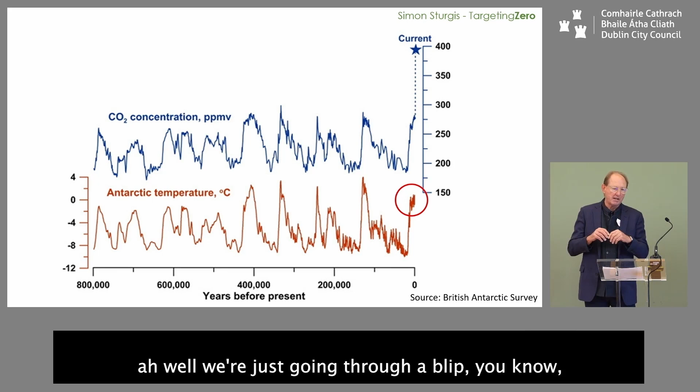The reason for this is because a lot of people say, well, we're just going through a blip, this is normal, it goes up and down, and we'll be back to normal in a couple of decades. What this is showing, if you look at the top line, which is carbon dioxide concentration in the atmosphere, and the red line below is Antarctic temperature—this was from data sourced by the British Antarctic Survey. Both of these graphs cover the last 800,000 years, so that's a pretty significant period of time. You'll notice two things: one, temperature and carbon follow each other around, and secondly, they go up and down roughly every 100,000 years.

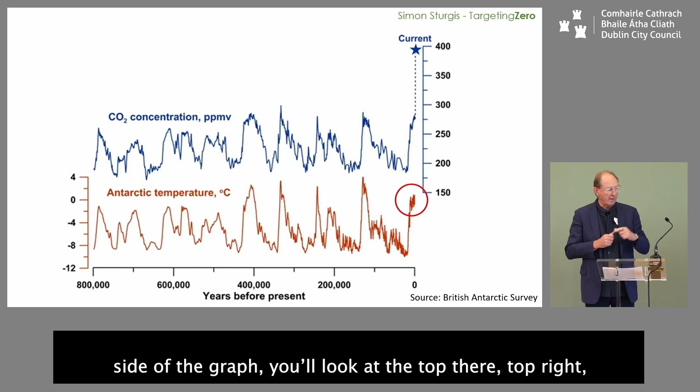If you move over to the right-hand side of the graph, at the top right, there's a little blue star showing what it says is current. In fact, that's a bit out of date—it's now about 425 parts per million. It's gone up since this graph was done in about 2016. You'll see, obviously, that has jumped right out of the normal rhythm.

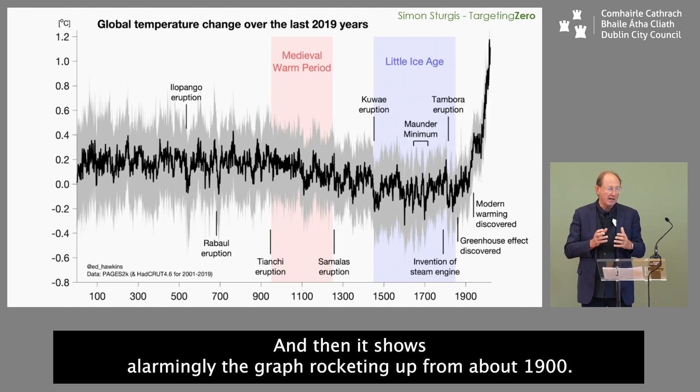Below that, I've put a red circle around the top bit, which represents the last 2,000 years. If I zoom in on that, this is what the last 2,000 years looks like. You'll see that there is variation year on year and decade on decade. It highlights things like the medieval warm period, the little ice age over the 1500s, 1600s, 1700s, 1800s, and then it shows, alarmingly, the graph rocketing up from about 1900. That's happening in parallel with that carbon dioxide rise and the little blue star.

So this is significant and real. It is jumping out of the regular rhythm of things. And anybody who says, well, it's just temporary—I'm not a climate expert by any means, but I think this is pretty convincing.

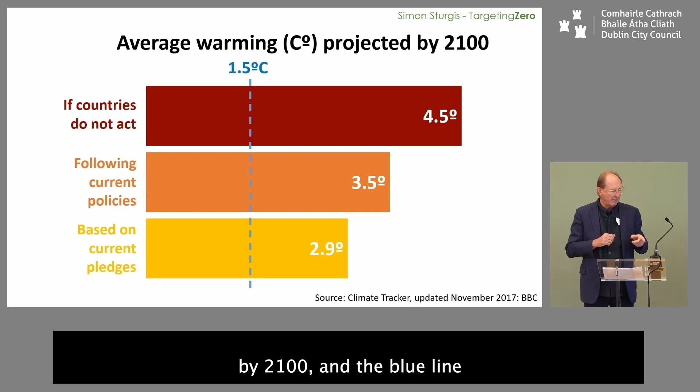So if we look at what it is we're supposed to be doing, certainly with the COP, the international agreements, the idea is to limit the temperature increase to 1.5, maybe 2 degrees at the outside. This is showing what things might look like by 2100. The blue line represents the 1.5 degrees, and then at the top, if countries do nothing, following current policies in the middle, and based on current pledges—obviously there's a gap between pledges, policies, and actual real action. Already we seem to be missing all these targets, and the things are not looking promising.

This map here comes from—I forget where I got it from—but what it's showing is what this piece of the world would look like. All the red bits show what would happen with an increase in temperature of only 3 degrees, never mind some of the bigger figures.

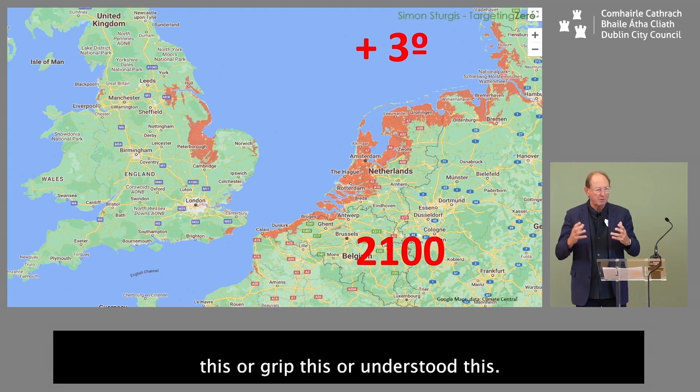So all that part of Holland and parts of England, and indeed those ladies I showed you with the child in the second slide, places like Bangladesh, and indeed places like Florida. I mean, big parts of Florida will also suffer. So this is pretty real stuff, and I think it is massively significant. And the paradox is that our politicians don't seem to grasp this or grip this or understand it.

But if we look who are the guilty, various figures have been mentioned today about the carbon emissions of construction and so on. I think the answer to this is that nobody's quite sure, but it is significant.

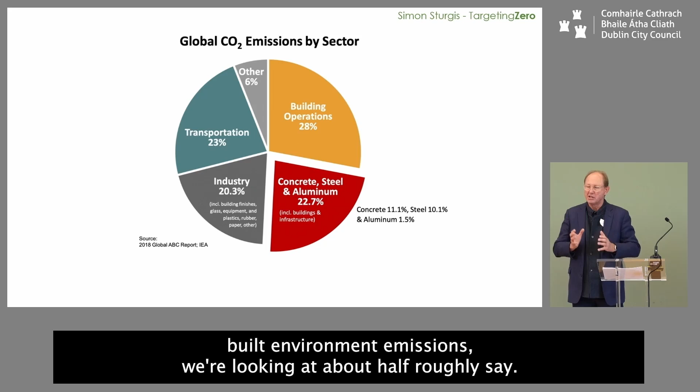So if you look at this diagram, you've got red, concrete, steel and aluminium. Now obviously not all steel and aluminium, or possibly even concrete, are used for construction, but a large proportion are. But equally, transportation - there's a lot of that 23% in transportation that would be construction related. So whichever way you look at it, between the yellow and the red, i.e. built environment emissions, we're looking at about half, roughly, say.

And the building operations really is about energy use. And the rest of it is to do with the carbon emissions from construction.

It's probably worth just mentioning what I understand these terms embodied carbon and what on earth they all mean. So for me, embodied carbon is to do with the emissions released as a consequence, in other words, the energy used and the consequent emissions from anything to do with materials. So this is sourcing materials, turning them into products, transporting them to site, building a building, but also then replacing bits and pieces over the life of the building, and ultimately, when the building's demolished, anything to do with that, and so on.

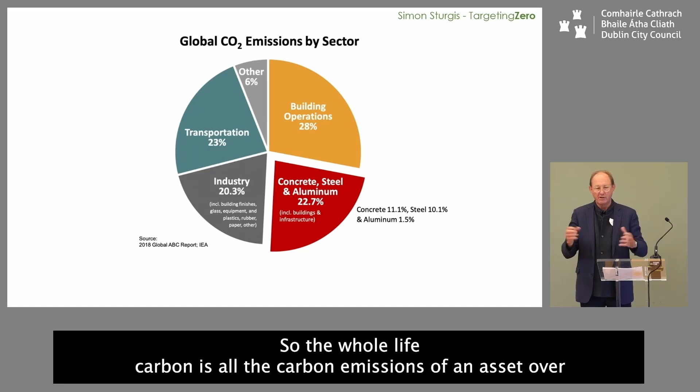And operational emissions is basically energy use, or in the case of something like a motorway, it would be things like car use, the petrol used by cars or trains, and aeroplanes and so on. So there's an element in there. And then whole life carbon is really the combination of those first two. So whole life carbon is all the carbon emissions of an asset over its lifetime - that's material, energy, everything else, repair, replacement, and so on.

So, as I say, about half of emissions relate to the built environment. This is global, and obviously country varies. And in an economy like Ireland or indeed the UK, it's probably a slightly smaller percentage than that 50%, allocated to the built environment.

And this is another way of looking at this, which is the global construction, and is generally taken to be roughly the equivalent of one new Greater London every 6 weeks. And you'll begin to appreciate, of course, it's not just a carbon argument, this is a resource-based argument. It's materials and carbon emissions. And of course, that is a vast amount.

I mean, Greater London is probably 10 times the size of Dublin, let's say. So that gives you some idea. It's probably a Dublin every 4 days or something, which is a ferocious level of expenditure of materials and emissions. And of course, a lot of that's related to things like population growth, but equally, a lot of that's related to things that are, frankly, in my view, unnecessary or need to be rethought.

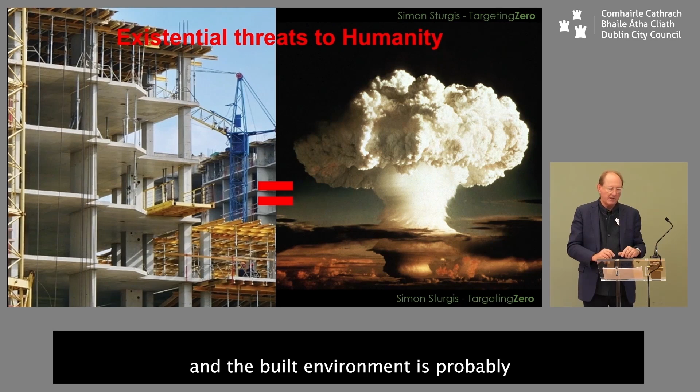So I don't think it's too far-fetched to say that, given that pie chart I showed you and so on, that construction and the built environment is probably a greater existential threat to humanity than nuclear war, which is quite an extraordinary thought. But I think, notwithstanding what's going on in Ukraine and so on, nevertheless, the emissions and the threat to us from construction is real. It's happening on a day-to-day basis. It's just slow moving, so we don't notice it so much.

And I thought I'd just quote Mark Carney. Now, Mark Carney, as you may know, was chair of the Financial Stability Board, and the FSB, as it's known, is the club of central banks. So all the central banks around the world have a club, and he was chair of it. He was also governor of the Bank of England, and he said, we can't get to net zero by flipping a green switch. We need to rewire our entire economies.

And if you sort of pause and think about that second thing, that is pretty radical. And it's sort of saying that our economies are not really fit for purpose when it comes to climate change and dealing with it. And I suppose you then think, well, if the economies aren't fit for purpose, what about the politics? And how does this all connect up? And why isn't it working?

And I think what's interesting in the UK, we've got, on the one hand, a Conservative government which has passed legislation to achieve net zero by 2050 and with interim targets we'll come to, but at the same time, they're taking away all the ability to do it. And Rishi Sunak only just recently took away a couple of pillars that would help that to be achieved. And they say, yes, we're still good for net zero by 2050, but they're not enabling it to happen.

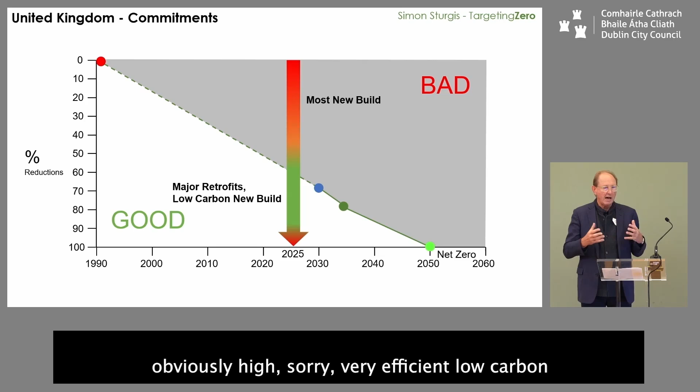Now if you look at construction for buildings that are due to be finished in 2025, what that's showing is that most new build, which is what's happening now, is above the line, in the red zone. Most new construction is sitting there. Obviously very efficient, low-carbon new build tends to be below the line or on the line, and the major retrofits...

typically are below the line or on the line. So that's one of the reasons why retrofitting and refurbishment is better in carbon terms, because it meets the trajectory. I'm talking about the UK at the moment, I'll come to Ireland in a second.

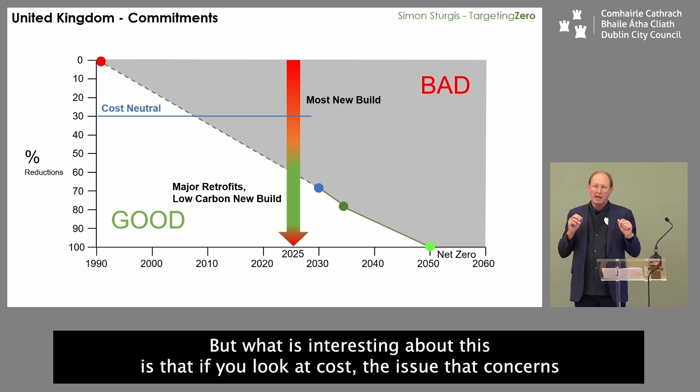But what is interesting is that if you look at cost, the issue that concerns most people building, whether offices or residential, is they want cost neutrality. They don't want to spend extra money on achieving low carbon outcomes. And it's certainly possible with today's supply chain to get about 30% reductions without any extra cost, in my view, and I've had direct experience in both residential and office of this being entirely achievable.

What it requires is for the design team and the developer and so on to show enthusiasm for this. The developer and the design team have to show willing and intent to achieve these things.

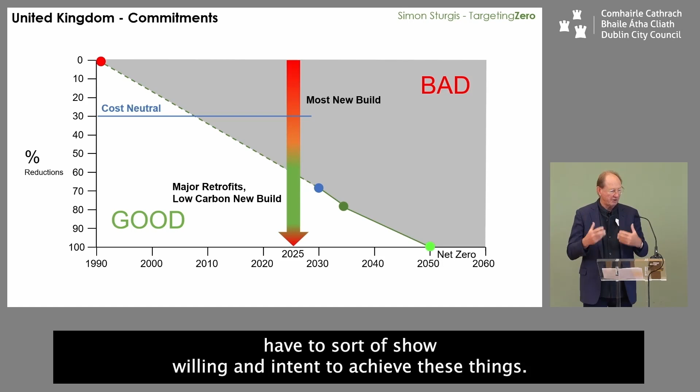But obviously, if the developer can see there is benefit, in other words they can sell a green property at a higher premium, then they can afford to spend more than 30%. And of course if government gets behind this, then the supply chains start to innovate - they're already innovating.

I know of an example in Holland where there's a company extracting unused cement from concrete. I didn't even know there was unused cement in concrete, but they're extracting it economically and selling it on. So those sort of innovations are really important, and government needs to get behind these things to encourage that.

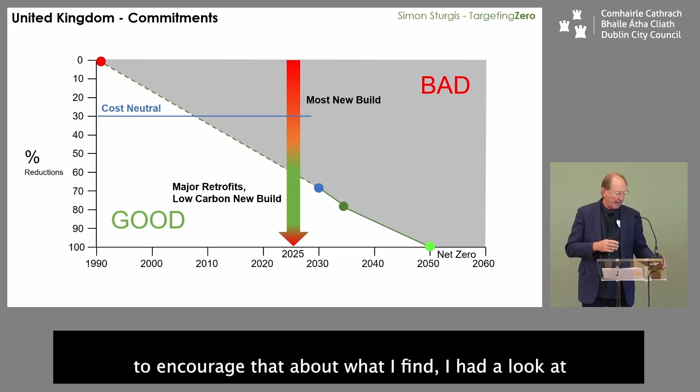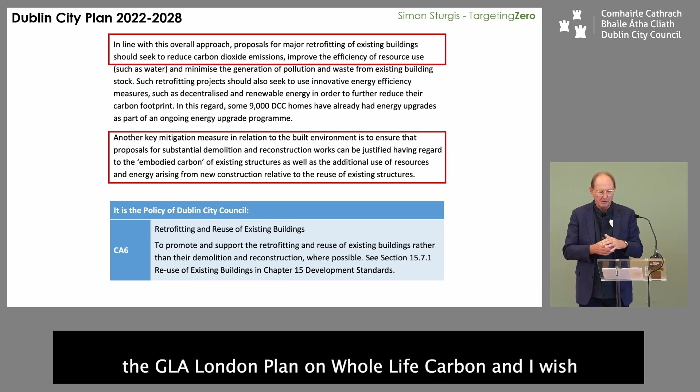What I was also interested in was looking at the Dublin City Plan for 2022 to 2028, which is obviously relatively new. You've got a couple of things which I thought were really great, and I say that because

I co-authored the GLA London Plan on Whole Life Carbon, and I wish I'd thought of this at the time, because this is really helpful, I think. So in the top box it says, in line with this overall approach, proposals for major retrofitting of existing buildings should seek to reduce carbon dioxide emissions and improve the efficiency of resource use. And then it goes on to say another key mitigation measure in relation to the built environment is to ensure that proposals for substantial demolition and reconstruction works can be justified having regard to the embodied carbon of existing structures, as well as the additional use of resources and energy arising from new construction relative to the reuse of existing structures. So, you know, that's fantastic.

I think it's a question of making sure you can pin this on the developers, and obviously the developers like to wriggle when this stuff's being pinned on them, and I'll come on to that a bit later.

But I thought I'd just show you something. This is some work we did for Grosvenor Estate in London, over about 400 of these properties. These are, in cases, Georgian and Victorian terraces and so on. We then collected data, and we were doing everything from regular retrofit to meet current regulations, Part L and so on, but we were also doing more exotic retrofits to EnerPHit standard, and in some cases, new Passive House. And what was really interesting is, and this is not our diagram, this is from Hawkins Brown, but it's quite well drawn. We produced a very similar diagram, but it was just more complicated to look at.

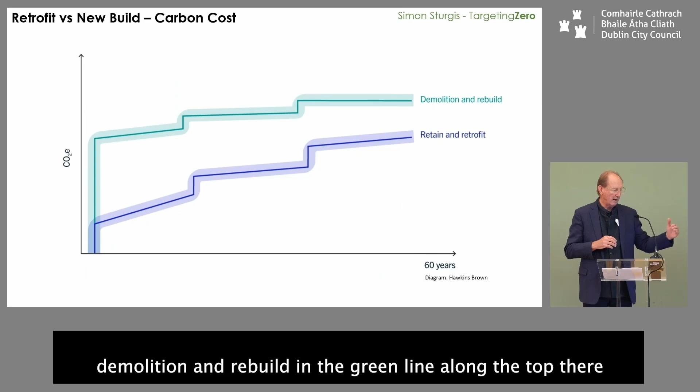So what this is showing is comparing demolition and rebuild in the green line along the top there, and retain and retrofit in the bottom line. It's showing what happens over 60 years. The argument you normally get from developers is, well, we must demolish this tired old building because it's grossly inefficient in energy terms, and if we build a nice new building, it will be more efficient, and so on. I've probably mentioned I'm not against new build at all, provided it's in the right circumstances. And the bottom line is retain and retrofit if you keep the building.

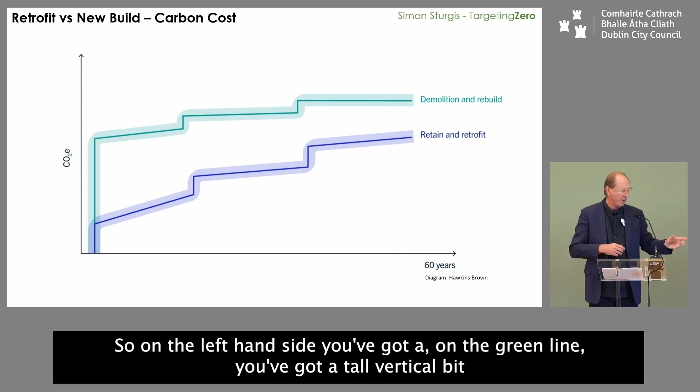I'll explain how these diagrams work. On the left-hand side, on the green line, you've got a tall vertical bit, and that is the embodied carbon cost of construction. Then you've got a horizontal bit running from left to right, which is the energy use over a period of roughly 20 years or so. And then you've got a little step, and that step is where you're replacing the plant and services as an embodied carbon jump, if you like.

And then you'll see the horizontal line gets more or less flat, and there's another step, so again, replacement and so on. The reason the lines are flat is because they're saying that the buildings are super energy efficient, and the assumption is that if the building is finished this year, it might be reasonably energy efficient, but it'll be even better after the next 20-year retrofit.

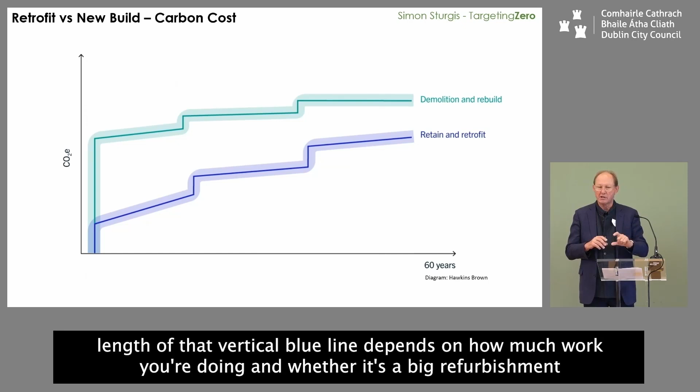Now, if you look at the blue line, it's showing a much lower embodied carbon cost at the outset. And obviously the length of that vertical blue line depends on how much work you're doing, whether it's a big refurbishment with extra floors on it, or just an internal refit for environmental performance reasons. Then you've got the diagonal line going up, which is showing the assumption that it's less efficient to upgrade an existing building. And then you've got similar steps as you go from left to right.

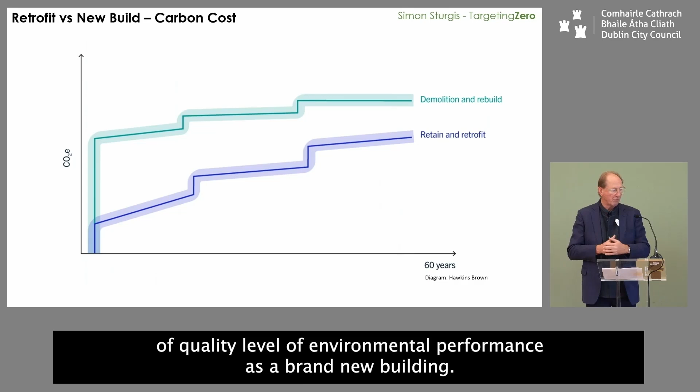A number of architects I've spoken to said actually they think they can get a refurbishment today to pretty much the same quality level of environmental performance as a brand new building. So anyway, what this is showing is that certainly over 60 years, your refurbishment or retrofit is more efficient overall than a new build, even an efficient new build. The reason, of course, is that you've got that big hit at the outset. So provided you do environmental improvements to your existing building, you're well ahead.

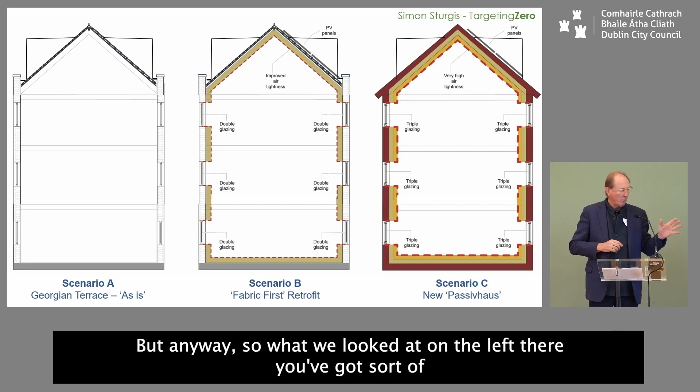Now, these drawings are meant to be a Georgian terrace, but the sharp-eyed of you will notice all the windows are the same height, so I won't dwell on that point. But anyway, on the left there you've got the building as is, and obviously that is very inefficient in terms of energy use. Then we've got Fabric First in the middle there, which is that building, but now we've insulated it, and we're making it more efficient, and I think there's double glazing or secondary glazing, probably more effectively, or not so much more effectively, but certainly less damaging.

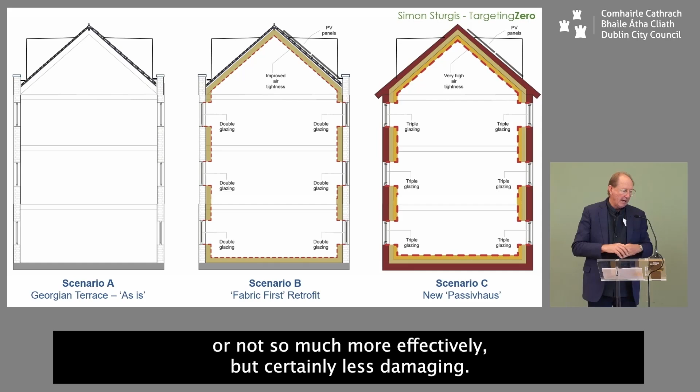And we've got maybe things like PV panels on the roof. So then the third option is knock it all down and build a new Passivhaus that's roughly the same size. And not surprisingly, based on that dark graph I just showed you, the lowest one, of course, is the one in the middle, which is the retrofit.

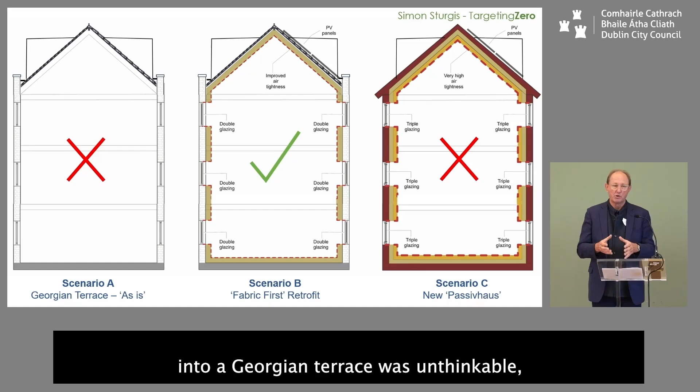But I think the important point here is that we have to be prepared. If we're going to value heritage assets, we're going to have to enable ourselves to accept changes. I remember not that long ago where the idea of putting a lift into a Georgian terrace was unthinkable, whereas now it's accepted as a necessary part of retaining the use and value within a building of that type. And I suppose it's a question of how do we do this?

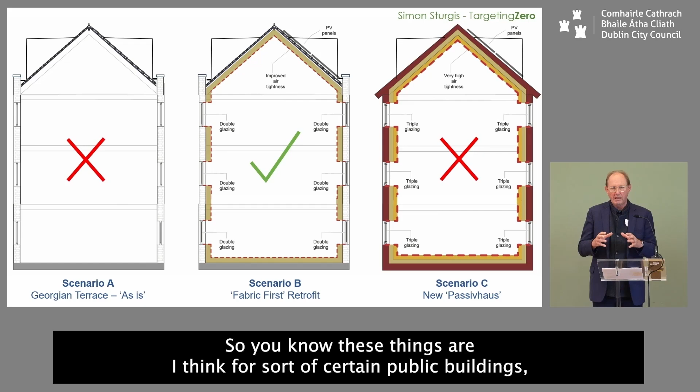How do we, for example, insulate a room like this? I notice we're all sitting here with our woolly pullovers on and scarves. So these things are, I think, for certain public buildings, obviously you take a different view, but for buildings being used as office space or residential, how do we ensure that they remain valuable to society? I think we have to be a bit more flexible in how we allow them to be modified.

And I think that actually we're entering a really exciting time, speaking from an architectural perspective, and I think the climate crisis is leading to an entirely new architecture. I think we're at the cusp of it at the moment, but for architects and indeed for users of buildings, I think we've got some really interesting possibilities coming forward.

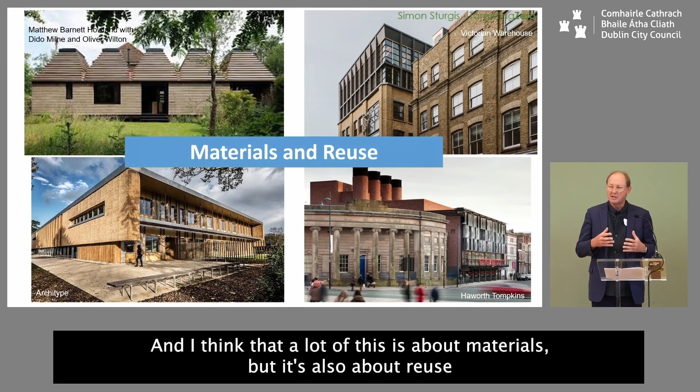And I think that a lot of this is about materials, but it's also about reuse. These four examples on the top left, that's Cork House, which we had some involvement with looking at the carbon costs. That building is entirely made out of cork, it's baked. Apart from the baking and the travel, which are high carbon activities, the rest of it was incredibly low. So this was a ridiculously low carbon building.

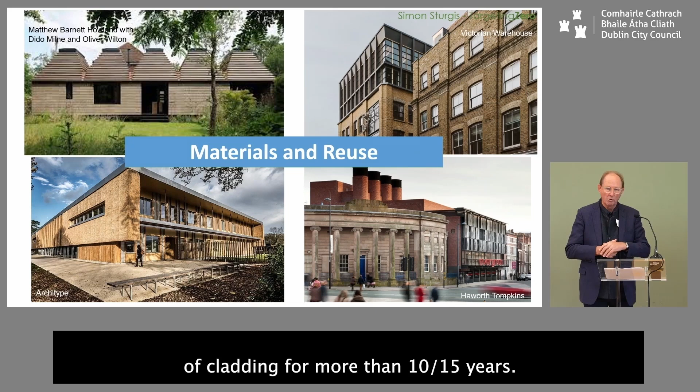Bottom left is a building by Architype, an office building for the University of East Anglia, and it's clad in thatch. Now you might be thinking, well, that's obviously ridiculous because thatch doesn't last very long. But actually, when you think about it, you won't get a warranty out of an aluminium piece of cladding for more than 10, 15 years. And this is being used vertically, so it will probably last even better than a sort of roof type situation. So it's not that crazy.

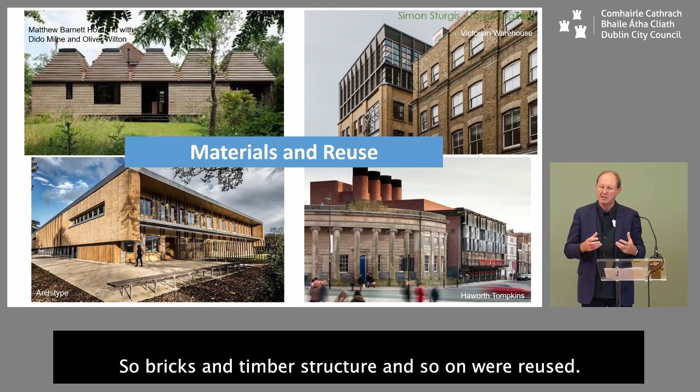So that's materials. But today is not a materials discussion day, today's a reuse discussion day. On the bottom right, you've got Haworth Tompkins' Stirling Prize-winning Everyman Theatre, and in that they reused a lot of materials from the existing building, so bricks and timber, structure and so on were reused.

But I think the one that's more typical of what we're talking about today is this Victorian warehouse, I'm not sure who the architect was for the extension, but this is where, of course, the building has been retrofitted, refurbished, and they put an extra floor on. I think it's that kind of recognition that we can reuse these buildings, but also add to them and adapt them.

And that is because there's a clarity for me about that. The heritage value, there are a lot of people who know a lot more than I do, and in this room certainly, people who can make the heritage case. And clearly, I think the interesting point here is that, and I'll come on to Marks and Spencer in a minute, how the heritage and the environmental arguments run in parallel, not totally overlapping, but substantially overlapping.

I'm coming at this from a carbon and resource optimization issue, and if that means putting extra floors onto something, the heritage argument might be that you shouldn't put 5 floors on top of that building, you might put 2 on, or none. So I'd like to make that point, which I made to Save Britain's Heritage as part of the Marks and Spencer issue.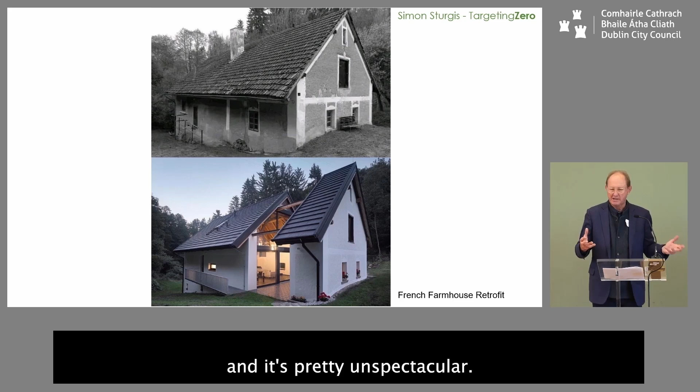This is a French farmhouse, and it's pretty unspectacular. But what they've done is something quite clever with it. They've chopped a big chunk out of it, which you might argue from a heritage perspective is a bit random, and they've done things to the roof which might not be entirely acceptable. But still, they've shown that you can put new life into an old building. I'm going to show you a few examples that I think are interesting.

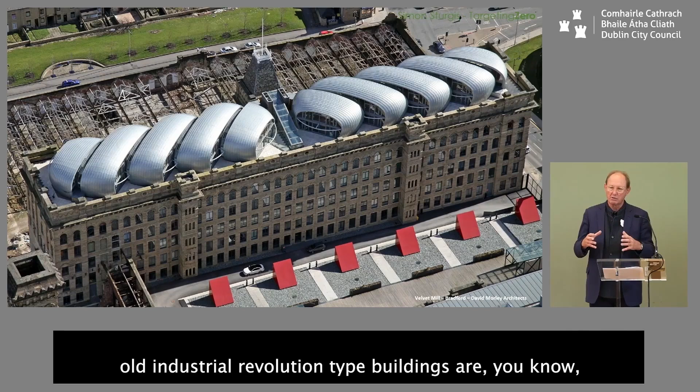This is one by David Morley Architects at Bradford. These big old industrial revolution type buildings are still a resource, and this has been retrofitted throughout the main bit of the building. But of course what they've also done is put something pretty unusual on the roof. I think it's that kind of thing which is really exciting and shows great potential of how these buildings can be given a new lease of life, a new image, and become fit for purpose in the 21st century.

This one, in fact, there was a slide yesterday, I think Susan MacDonald had this, so I'm sort of stealing her thing really.

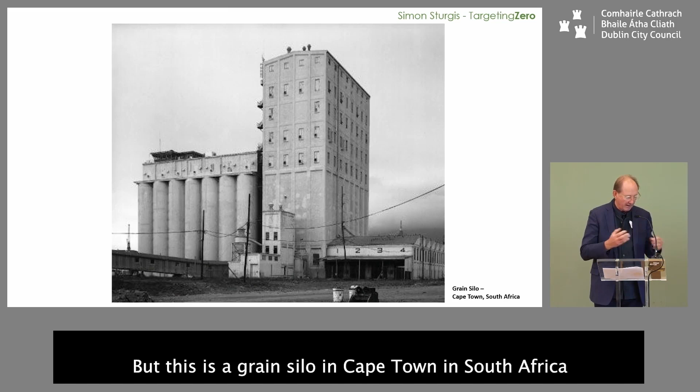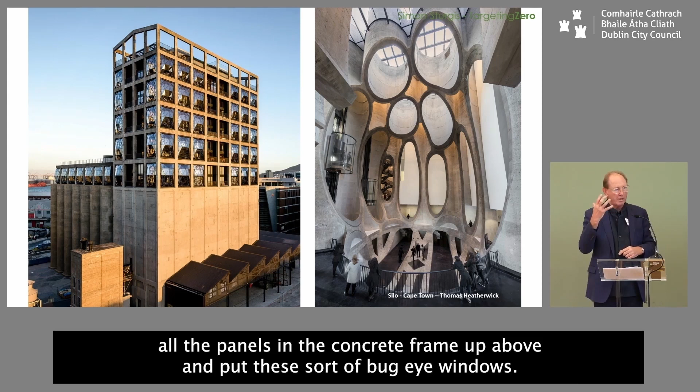This is a grain silo in Cape Town, South Africa, a classic concrete frame industrial building. It's been turned into a hotel, restaurant, exhibition space and so on. You can see on the right where it's been hollowed out, those silos hollowed out to create the most amazing space. As Thomas Heatherwick did, they've knocked out all the panels in the concrete frame up above and put in these bug-eye windows. I don't know what the carbon cost of this is, but demolition is usually a lot less than construction, simplistically put. Nevertheless, they've taken a very unpromising looking building and turned it into something really quite amazing.

This comes back to my use of imagination, not being frightened of buildings.

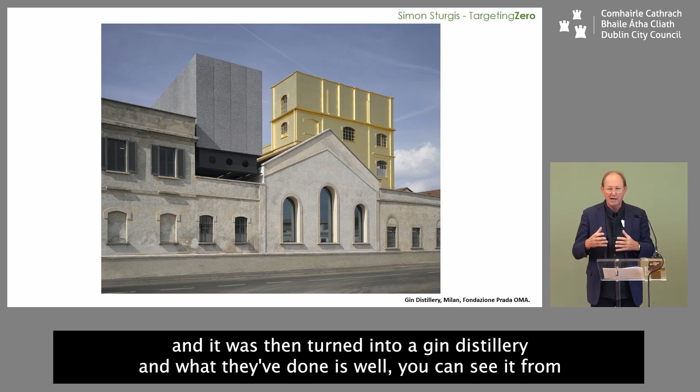This one is a gin distillery in Milan, by OMA. You can see on the facade on the street, this building was pretty much derelict, and it was then turned into a gin distillery. What they've done, you can see from the photograph, is put in something fairly, I suppose, both loud and quiet at the same time, if that makes sense. They've done some fairly careful compositional things, but nevertheless done something fairly dramatic to revitalize and reuse this building.

And I use this one: a 13th century church, Dominican church from the Dominican order, in Maastricht.

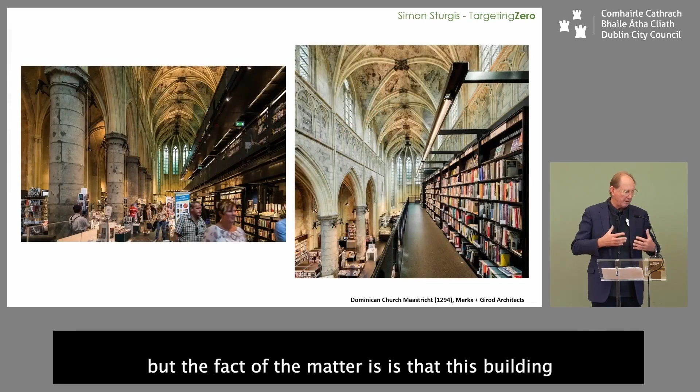And it's been turned into a library. Now, some people might be a bit alarmed about what has been put in there, but the fact is that this building has now been given a whole new lease of life as a library, and it's now full of people. You can see at the top there, you can now go up to the upper stacks, you're now almost up in the vault. I think what's happened is they haven't been overly precious, but they haven't damaged the original fabric either, arguably possibly apart from the floor. What they have done is given a new purpose and new life to this building.

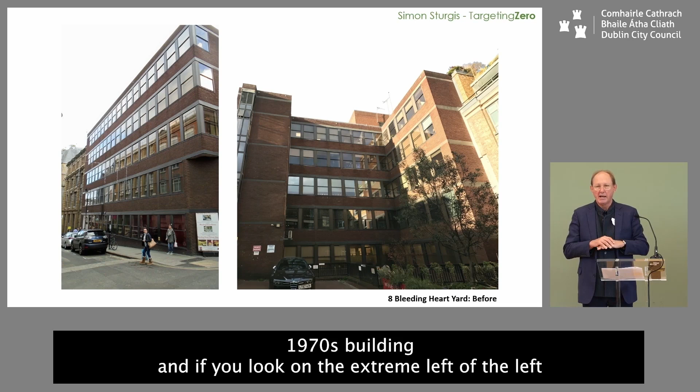And finally, on this series, before I get onto the case studies, I want to show you this. This is a building in London which backs onto something called Bleeding Heart Yard. This is a 1970s building, and if you look on the extreme left of the left-hand photograph, you can see a little Victorian sort of warehousey type building.

Now, on the right-hand photograph, you can see the building sort of recesses in, and that part of the building faces onto a little courtyard, which is Bleeding Heart Yard. And in fact, that recess in the 1970s building completely wrecks the kind of experience of that little courtyard. And what the architect, Amin Taha, has done is this.

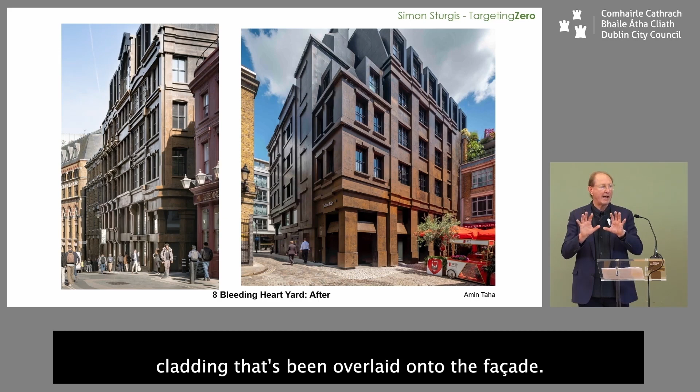Now, what you're looking at is the same structure, so he hasn't taken the structure down. What he has done is filled in that recess to complete the courtyard. But what you're looking at here is perforated steel cladding that's been overlaid onto the facade. It's not exactly pastiche, but it's like a sort of ghost of what was there before, because what he's done is researched the previous facades and then had made out of metal additions.

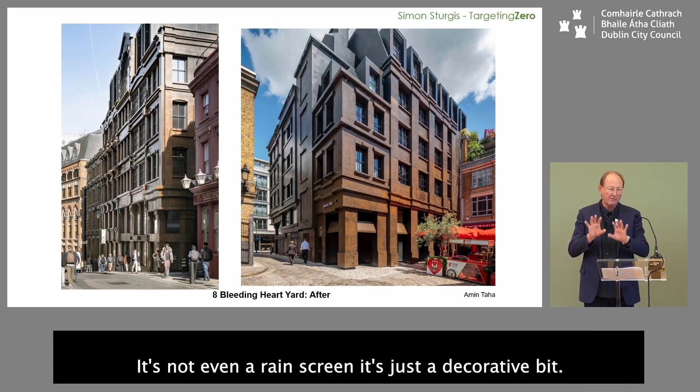So if you look on the left-hand side of the left-hand picture, you can see that little Victorian building again, and all that stuff to the right of it, i.e. the new facade, is metal. And the rain will go straight through it - it's not even a rain screen, it's just a decorative bit. But what it has done is, if you like, imagined the street and brought back the buildings that were there, but he's also given himself a bit of license.

So, I mean, that's a kind of slightly weird example of how you might deal with these things. But what he has done is relatively low carbon, and what's also interesting is that it's starting to solve some other issues.

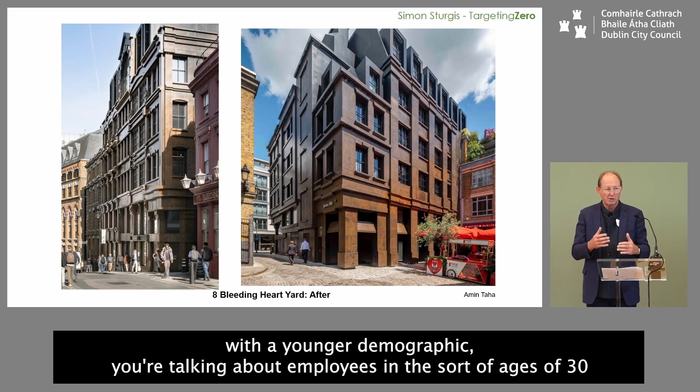This has been taken by a Swiss bank, Julius Baer, and as finished, it's about 30,000 square feet. The problems it's solved is, firstly, a lot of these companies now have a younger demographic - employees in the sort of ages of 30 to 40-ish who are more concerned about the environment. And for them, being in a building that is not ostentatiously gobbling up air conditioning as a big shiny box and so on.

I'll come on to big shiny boxes in a minute. But this is, if you like, more environmentally concerned, which is of interest.

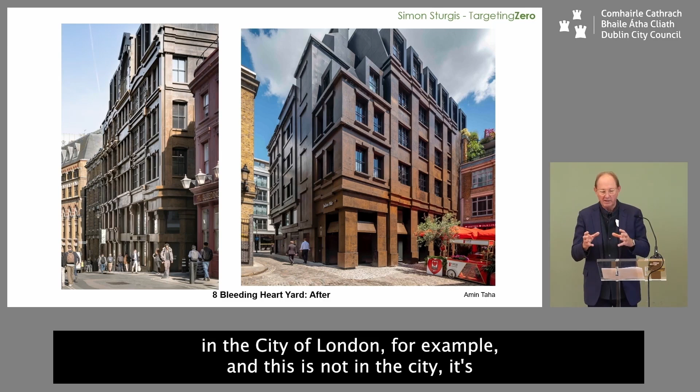The second thing is the sort of post-COVID problem of working from home. One of the problems that a lot of big companies have got in the City of London, for example - and this is not in the city, it's in Farringdon - is that because of COVID, a lot of people don't want to do a full 5-day week in an office building. They want to do maybe 2, 3, or 4 days a week. So suddenly these buildings are substantially empty for chunks of the week, and the employers want to entice people back in. What they're finding is that people like to go back in if there's an interesting building to go into.

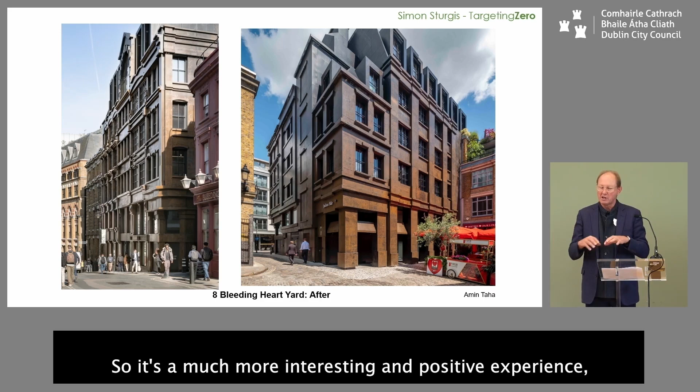And of course, going to this is far more interesting, and I've been around it - it's a much more interesting building, and it's used a lot of timber and so on. So it's a much more interesting and positive experience, even though, compared to the 1970s previous version, there's less window, it actually is a much more pleasant experience, a more interesting experience being in this building.

I'm going to talk through two case studies. One is Selkirk House, which is a concrete box, and the other is Marks and Spencer. Starting with Selkirk House, there's a planning application in, and it's been grinding along for a few months, maybe a year or so.

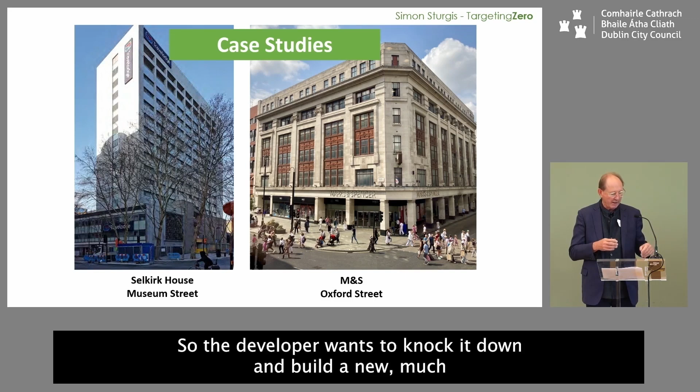I'm working on it in a similar way to Marks and Spencer. The developer wants to knock it down and build a much bigger building. On the left you've got the existing building or group of buildings - the tower, currently used as a hotel, and then Victorian buildings around the base of it. Those Victorian buildings were listed only a few months ago, which stymied the developer's plans to knock them down, but it restricted what they were trying to do.

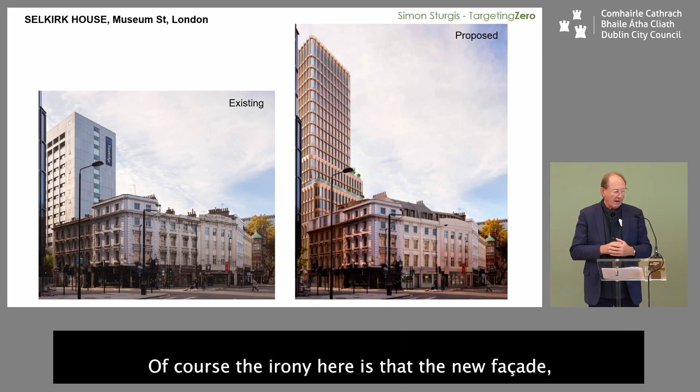On the right you can see a proposed new building. The developer explained that it's significantly more efficient and better compared to the original, as I was saying earlier. Of course, the irony here is that the new facade - that aluminium curtain wall facade you're looking at - will probably have to be replaced in about 40 years after completion. It might be 45, 50, or 35, whatever.

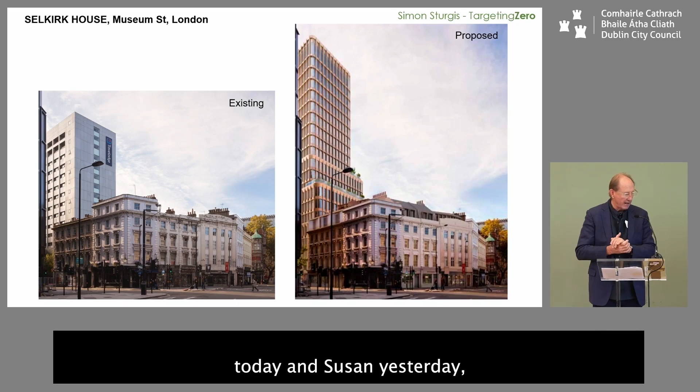The facade on the left is currently about 45 years old, and the windows need replacing, but as we've heard from various speakers today and Susan yesterday, there may need to be some work done, but fundamentally it's actually in good, perfectly all right shape - the engineers have confirmed that. So you're swapping one thing for arguably a worse thing, although it is shiny and new.

Replacing individual windows is one thing, but that facade on the right is a unitized system - each piece is probably 2 to 3 stories high and 3 or 4 bays wide, so it comes in big pieces. It's possible to change an individual piece of glass or the double glazed unit, but replacing any more than that becomes really problematic.

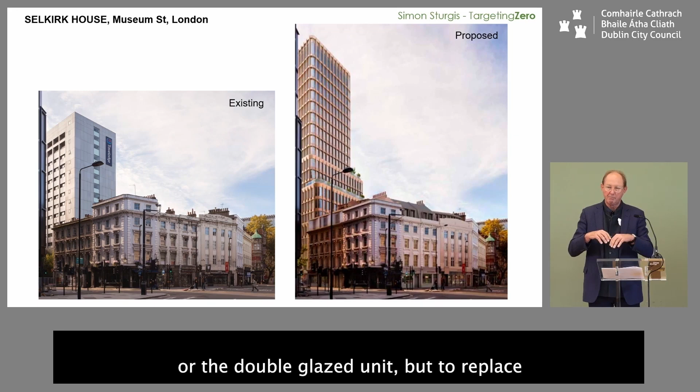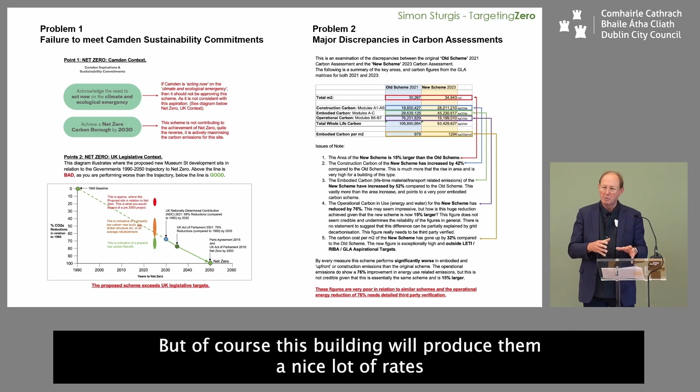I'm not going to take you through the gruesome detail, but basically I did a detailed analysis of the planning application and the carbon argument that went with it, because Camden claim they want to do carbon reduction at a faster rate than the government and achieve net zero better and quicker. But paradoxically, what they're proposing to accept on this project runs a coach and horses through their own policies. Of course, this building will produce them a nice lot of rates, so it's not entirely surprising they want to approve it.

I'm not going to go through all the detail, but first I looked at things like national net zero policy, GLA policy, and Camden policy. When you look at all those policies, they show intent about net zero and carbon emissions reduction, but they don't necessarily give you an absolute guarantee - I think the American term is a slam dunk. You don't get a slam dunk, you've got to do it.

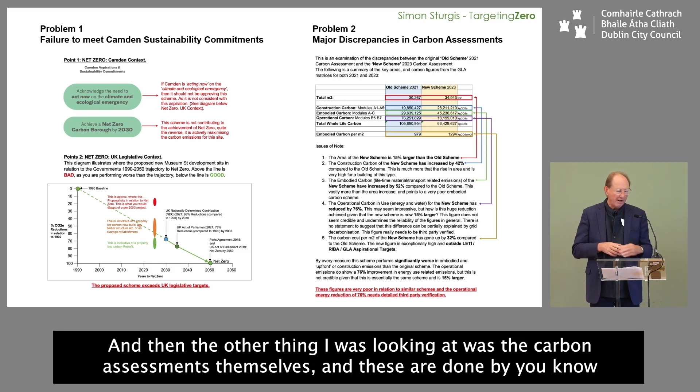So my first bit of argument was to explain why this building misses out on national, London, and Camden intentions and policies. The other thing I looked at was the carbon assessments themselves - done by proper assessors - to try and figure out where they've exaggerated or got things wrong.

In addition, there's always claims about targets - in the UK we have LETI targets, which is a grassroots organisation, London Energy Transformation something, there's RIBA targets and London targets. It's to show that these targets, whatever the developer claims, are really not being met.

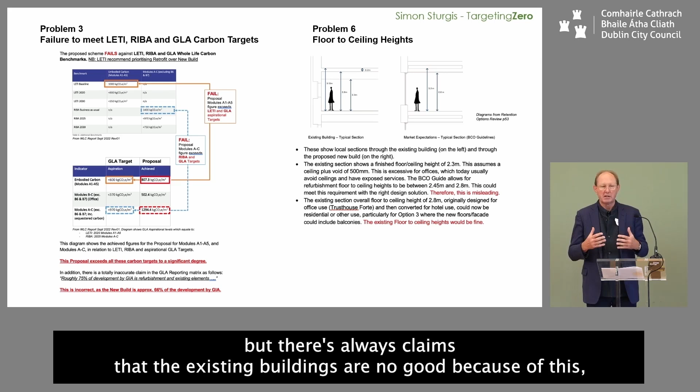Then there's all the usual things, which I'll go into more detail with Marks & Spencer, but there's always claims that existing buildings are no good because of this, that, and the other - for example, floor-to-ceiling heights. In fact, this building meets British Council for Offices guidelines for refurbishment, not surprising since it was originally built as an office building. So what I try to do with these things is get through all the smoke and mirrors and work out why - I hesitate to use the word lies, but there's all this nonsense going on in this world.

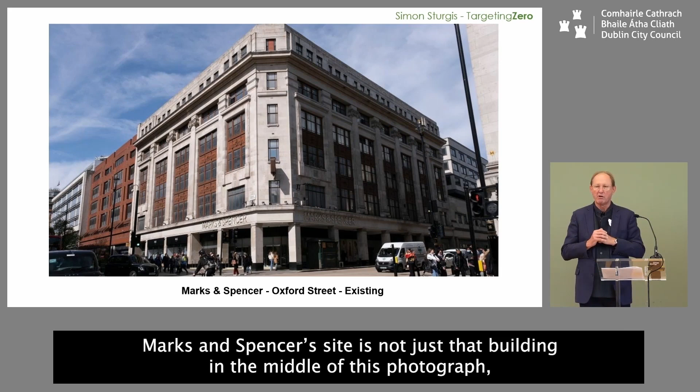So now I'm going to talk a bit about Marks & Spencer. The Marks & Spencer site is not just that building in the middle of this photograph. It's also the red brick building on the left of the central building, and you can just see on the top right there, just next to the pillar - that's Selfridges, incidentally. You can see a couple of stories there. That building is also part of the site. So it's quite a big site, and it's not just the corner building.

And actually, that corner building's been knocked about a bit. What is interesting about it is it's probably not an architectural gem, but on the other hand, it is an important cultural gem, and a lot of people relate to it and think of it as an important part of their experience.

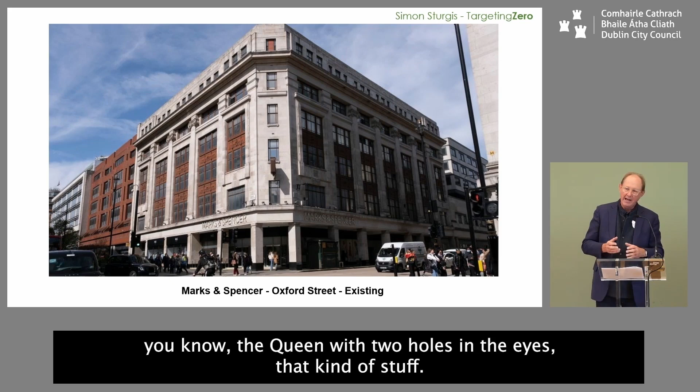As Oliver mentioned, this project started in about 2018, and Marks & Spencer have been running this site down intentionally, internally and externally. The bottom of that red brick building is full of kind of rubbishy tourist things - the Queen with two holes in the eyes, that kind of stuff. On the other side of the street are some very fancy fashion shops. So there's no excuse - it's just an intentional thing.

The other thing about the central building is that it has - and I'll come onto this a bit more in a second - generations of rubbish in it. All the windows have been blocked up. It's got about 50 years of plant. They've just laid stuff on top of each other, and it's got all sorts of other horrors going on.

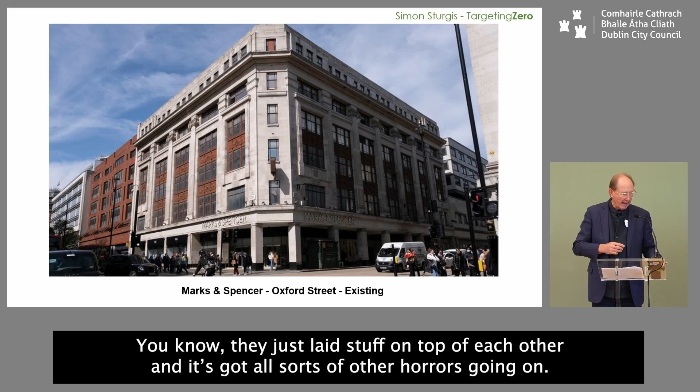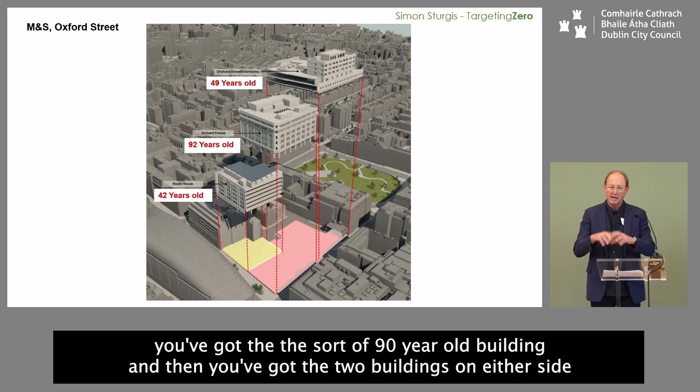And if you look at this site as a whole - it's a group of buildings. In the center there, you've got the sort of 90-year-old building, and then you've got the two buildings on either side, which are 42 and 49 years each respectively. It comes back to the point I was making earlier about AIB, which is, surely it's a crime to be demolishing buildings that are less than 50 years old, certainly capable of reuse. And this whole issue of reuse - Marks & Spencer went out of their way to trash these buildings, which I will explain as we go along.

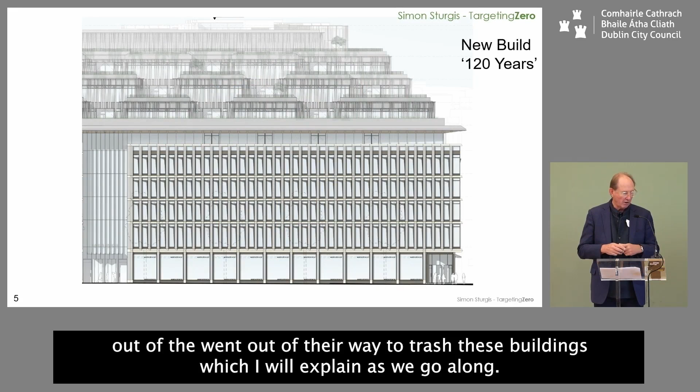So the claim about the new building was that it was a 120-year building. This was claimed by the architect publicly on numerous occasions. But paradoxically, it's obviously not.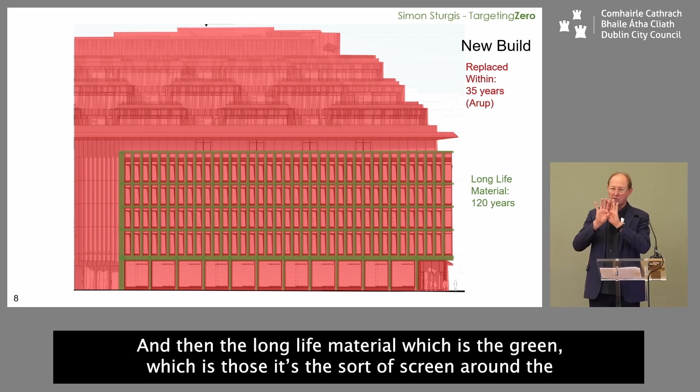If you look at this diagram, these are my colors. The red represents everything on the outside that has to be replaced after 35 years. Now, that's not my number - that is from Arup, who did the carbon assessment, incidentally done by an ex-employee of mine, so of course it's absolutely perfectly brilliant. Then the long-life material, which is the green - it's a sort of screen around with windows in, but the green bit is a concrete frame with brick and stone in it. So there's no reason why that shouldn't last 120 years. And of course, internally, you've got all the plant and services and partitioning - all that would have to be replaced as well.

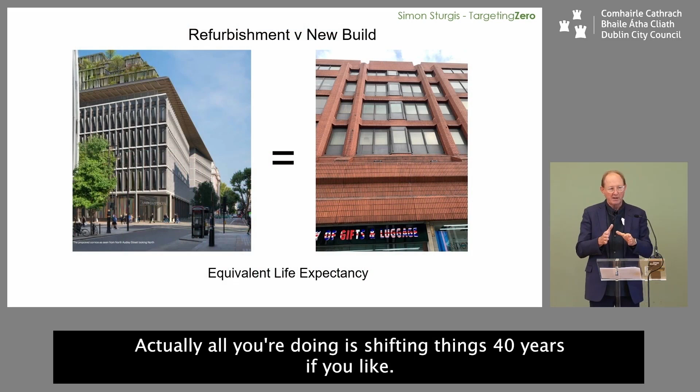And if you look at the proposed against the existing - this is the red brick building - actually all you're doing is shifting things 40 years, if you like. So the building on the left will be in the same position in 40 years' time as the building on the right is today. So, you know, this obviously shows a kind of nonsense to the whole thing.

And the other thing was that the developer claimed that they had done extensive refurbishment examinations, and this was from out of their document. These 16 little studies they claimed - we've examined this in great detail, and we've done 16 studies. Now, if you actually look at this in detail, which I've done, not one of those is a refurbishment. They are all variations on a new build.

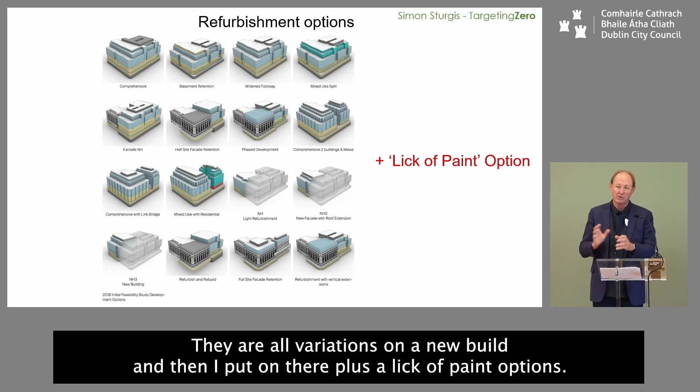And then I put on there a 'lick of paint' option. So when they went public with this, they said, well, if you compare taking these existing buildings and giving them a lick of paint - they didn't use those terms exactly, but that's what it boiled down to - with no environmental enhancement, no new this, no new that, obviously that was going to fail in relation to a shiny new building. And so that, at the end of it, was what justified the demolition. They'd done all this work.

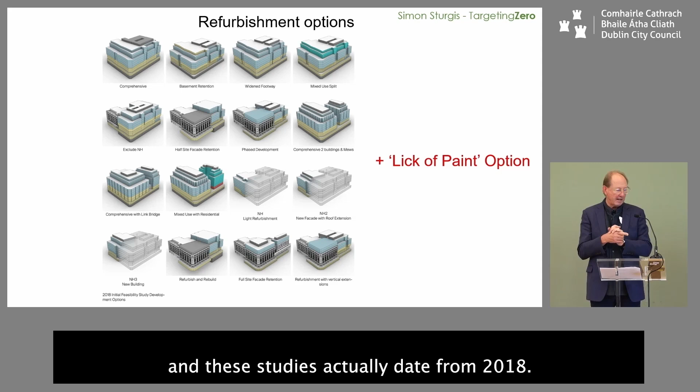And of course, the paradox was that this project for Marks & Spencer, they started on this in 2018, and these studies actually date from 2018 and 2019. As you may remember, I said the government's legislation came in about net zero. Well, nobody at Marks & Spencer, who, if you look at their website, claim to be very concerned about the environment - they have a thing called Plan A, which is all about environmental concerns, and it even mentions the scourge of demolition and waste - despite all that being on their website, they were pushing ahead with this from say 2018.

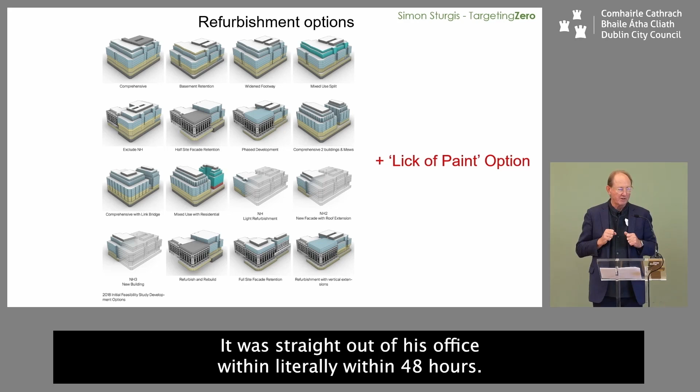Now, where we are now, in overall terms, as Oliver said, it was given to Sadiq Khan, the mayor of London, who dropped it like a hot potato - it was straight out of his office literally within 48 hours. It went to Michael Gove, who called it in and asked for a public inquiry. And that involved a sort of guerrilla QC who beat me up and various other people up. And anyway, the outcome of that was that it then came back to Michael Gove.

For those of you taking any vague interest in politics in the UK, you'll notice there's been sort of endless musical chairs, and by some strange, wonderful quirk of fate, Michael Gove, having called it in, got fired, got brought back - oh, the thing's gone out, oh back again - so by the time he got back in his job, he was able to chuck it out, so to speak. So that was very fortuitous.

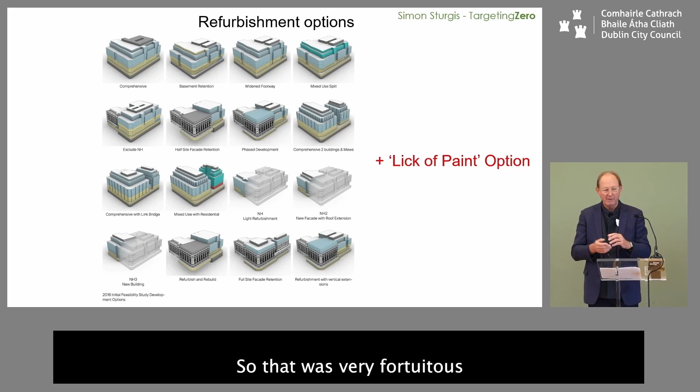And where we are now - Marks & Spencer got very upset, threw all their toys out of the pram, and it's now gone to the High Court. So it's no longer involving - it's now lawyer versus lawyer. So Marks & Spencer is spending, no doubt, large sums of money on lawyers, and the government likewise. But the irony about this is that the new building is 60,000 square meters.

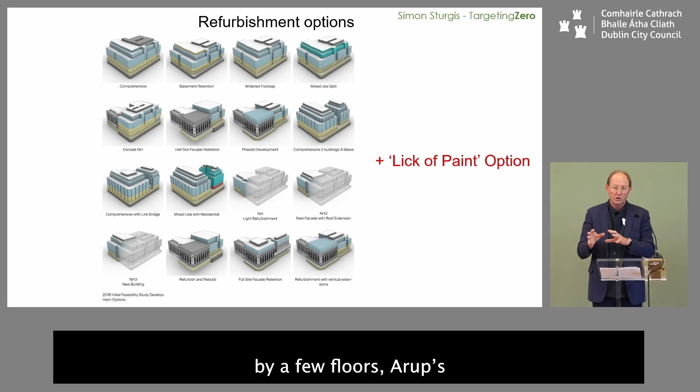And I worked out that if you kept the existing buildings and extended it by a few floors - Arup's own calculations reckoned you could get between 1 and 3 floors on all the different bits - so it was possible to extend, you could get about 50,000 square meters. And if they'd done that from the outset, they would have been finished and making money out of it now, rather than, even if they win at the High Court, they won't be finished until 10 years after they started. So, you think, well, this is all crazy.

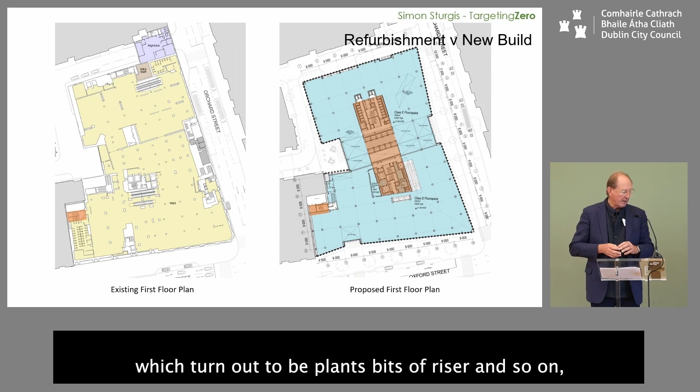Anyway, so just to show these floor plates - on the left there, you've got the existing typical floor plate, first floor plan, and on the right, you've got the new build floor plate. As you can see on the left, it's a real muddle - there's all sorts of things like extra columns which turn out to be plants, bits of riser and so on, and it's been added to and changed over the decades, so it's a real mess. And on the right there, you've got a nice clean plan with a central core and so on. But I believe you could actually replicate very much the same thing - if you cleared out all those cores and opened up the windows, you'd have something very similar.

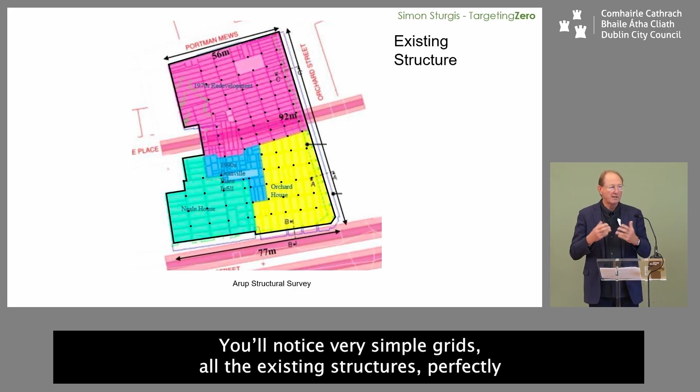And the justification for this was the structure. So this is Arup's diagram which shows the existing structure, and you'll notice very simple grids - so all the existing structure is perfectly basic once you get through all the fog. But of course they didn't want to know about that.

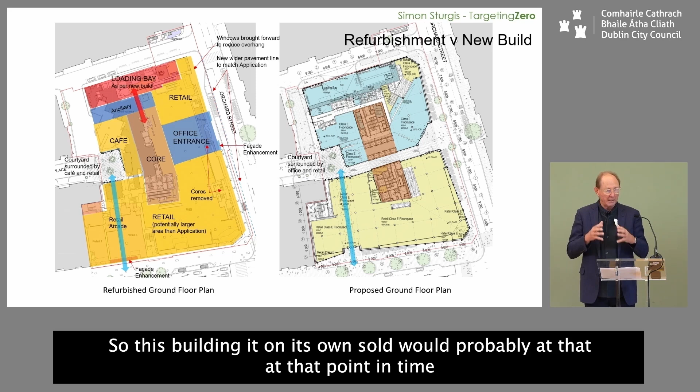Certainly when I looked at the share price of Marks & Spencer at the time of the inquiry, they were capitalized at about 2 billion. And if they'd built this building, let it, and sold it, they might have got about 900 million to a billion. So this building on its own, sold, would probably at that point in time have been worth about half of the total capital value of Marks & Spencer.

Marks & Spencer's share price has gone up a lot, so it's now about a quarter, but it's still proper money to do this. So you can see why they're so desperate. A refurbishment, even if you extend it and so on, would be worth less than that.

That is true, but as I mentioned a bit earlier, if you got on with it and had done it, you'd be making money.

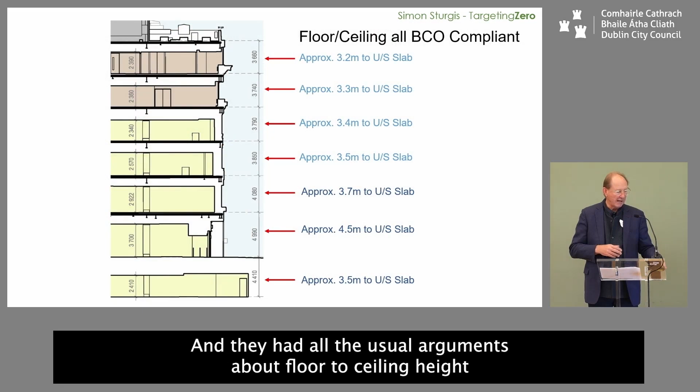And they had all the usual arguments about floor-to-ceiling height, but all the story heights were fine in terms of the way you might use offices today. The other thing was this claim about being a nice green building - they were proposing to extend the existing basement and add 2 further levels. Well, digging holes in the ground and filling them with concrete is not a green activity. So that was suspect.

I would avoid trying to do an alternative scheme personally, because I think what that does is give the opposition a target to attack. What I did was a kind of bubble diagram, and even then they attacked that and said, oh, well, you can't do this, you can't do that.

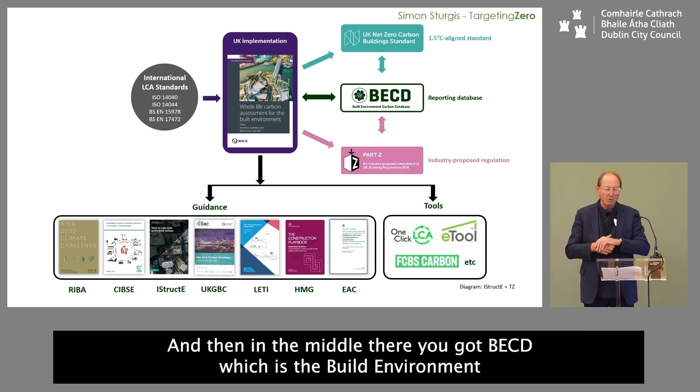And then in the middle there you've got BECD, which is the Built Environment Carbon Database, which is a reporting database. And then you've got Part Z, which has not happened yet but is something I'm involved with as well, which is an industry proposed regulation. So this is like the equivalent of Part L in the UK. This is Part Z, which is to do with whole life carbon in construction. So if you're doing a building regulations application, this would come in.

And then there's all those guidances, and I'm not going to go through them, but there's a whole range of guidances along the bottom there, and also feeding into tools, so things like One Click LCA, eTool, and so on.